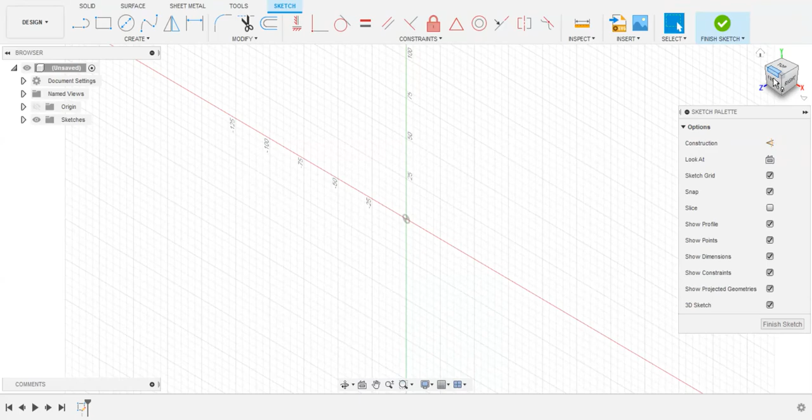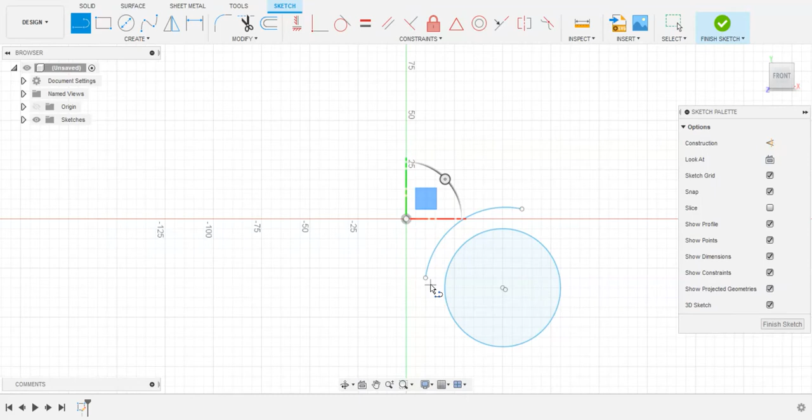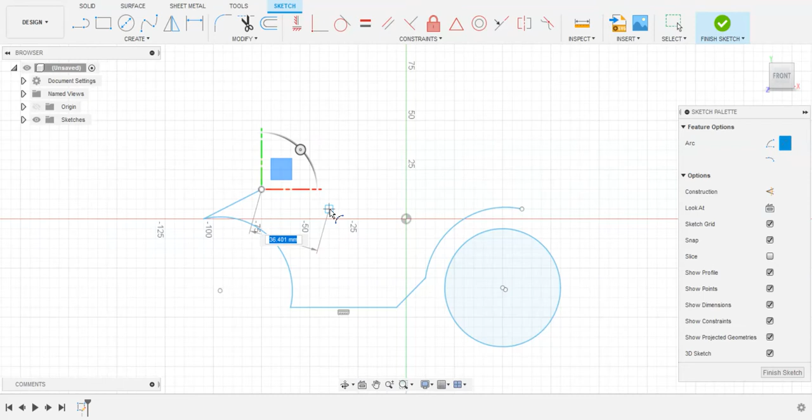First we are going to create a base model using a sketch. I'm going to prepare a little sketch to create our seat. I'm using arc to prepare the mud guard like this, and this here. I'm using arc again, 2-point arc, 3-point arc sorry, and I'm using arc once again.

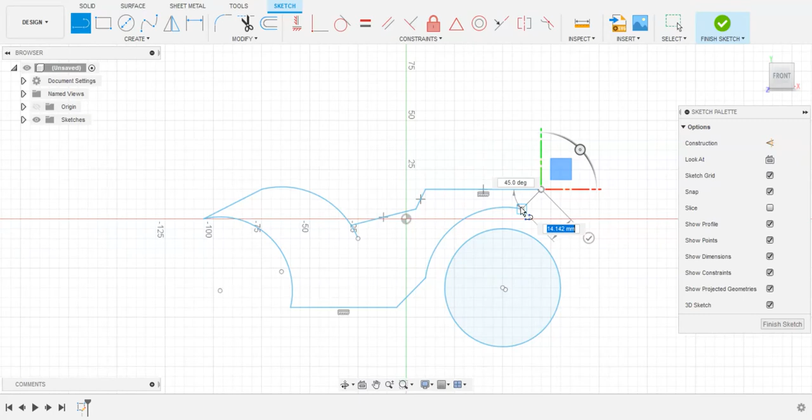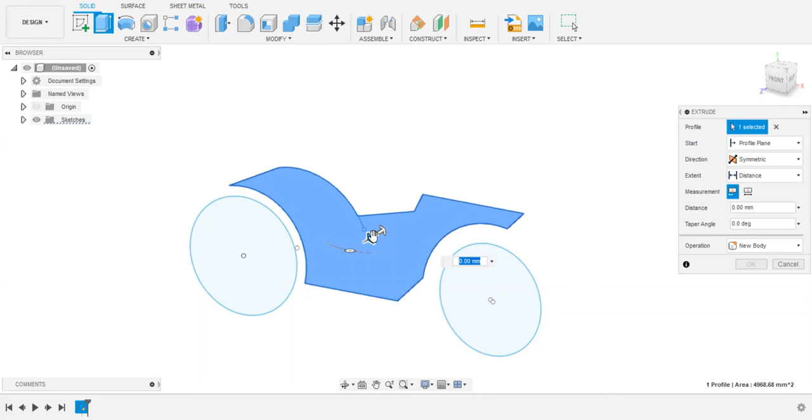Okay, use this circle again to create the wheel. Now this is just for the tutorial only, so use this symmetric side and extrude it like this.

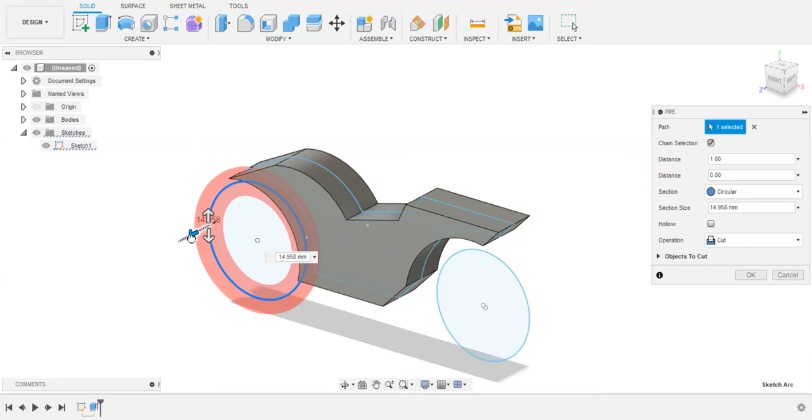Create a new body, open the sketch again, unhide the sketch, use pipe to do this, like this. I'm going to create the tires.

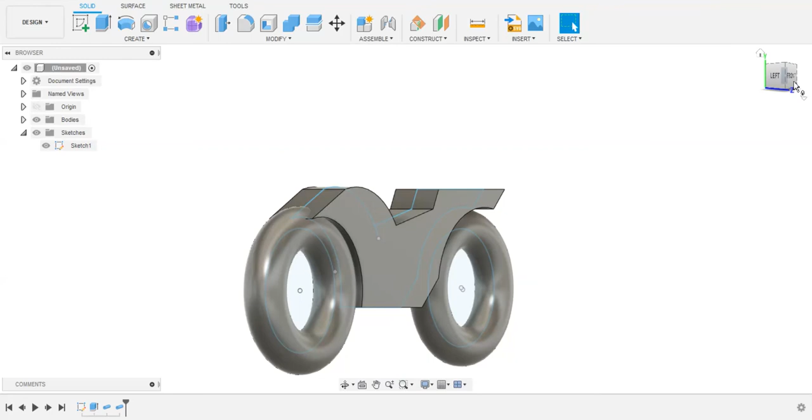Create a new body. Okay, use the pipe command again, select this new body. Now this is colliding with this body, so I'm going to move it a little bit, like here. Okay, now I'm also going to move this to here.

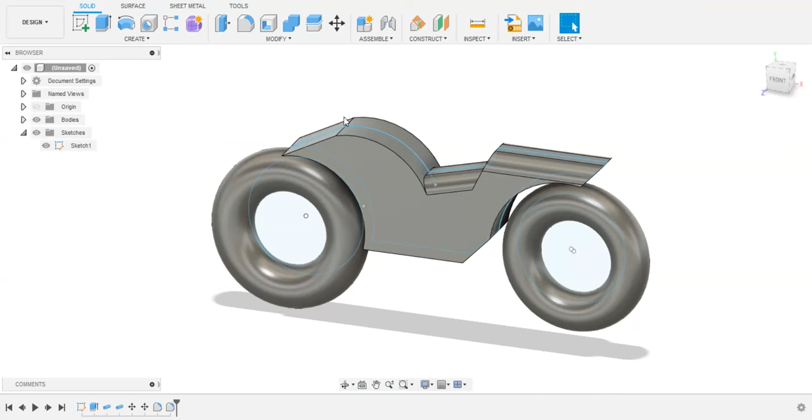Now we are going to create the seat over this surface. So first I want to give fillet to it, give fillet to it also, and also give fillet to it.

Okay, so go to Create Form, use this one, this here, and click here, use this 2-point option, and make a body like this.

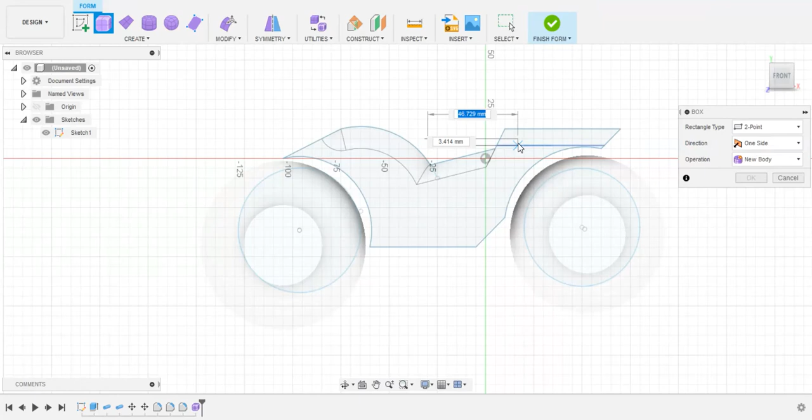Now what we have to do is do it like this, and I'm creating more edges inside this form.

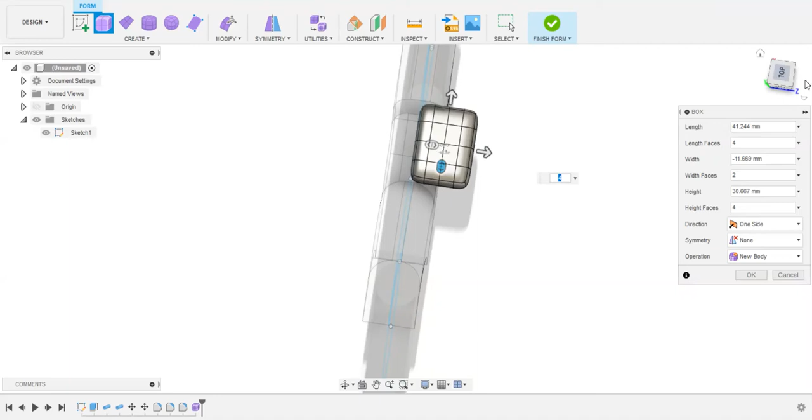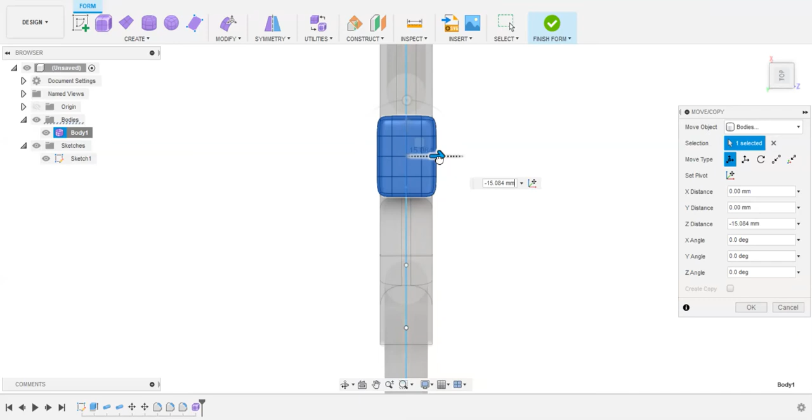Okay, create new body. Now if I want to move it between these bodies, right click on this body here and select Move and Copy, then click OK. Now if you click Finish Form, you will see our body is created, but it

is crossing this part a little bit, so we have to remove the correct part of this. What I have to do is create on this again and move/rotate to match it as parallel, and

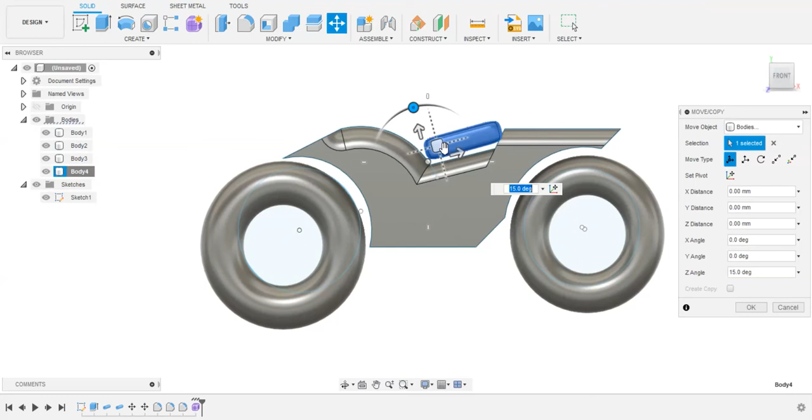click OK. Now we are going to use the Split Body command here.

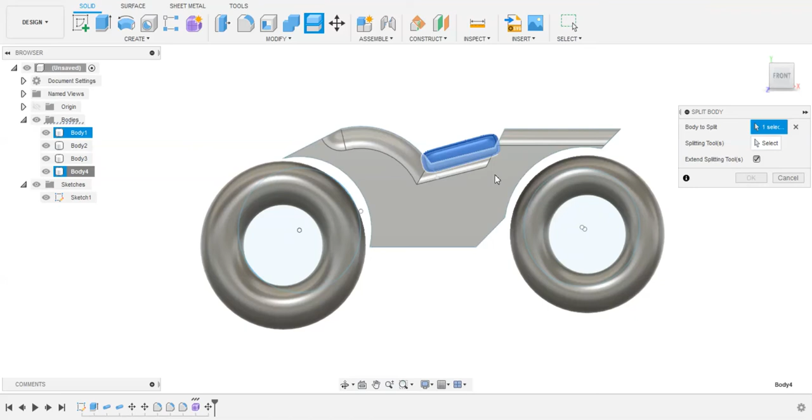We are going to split the body. By split, I mean I want to split this body using this tool. This base model is now the tool for this body, so I'm going to select the tool for it.

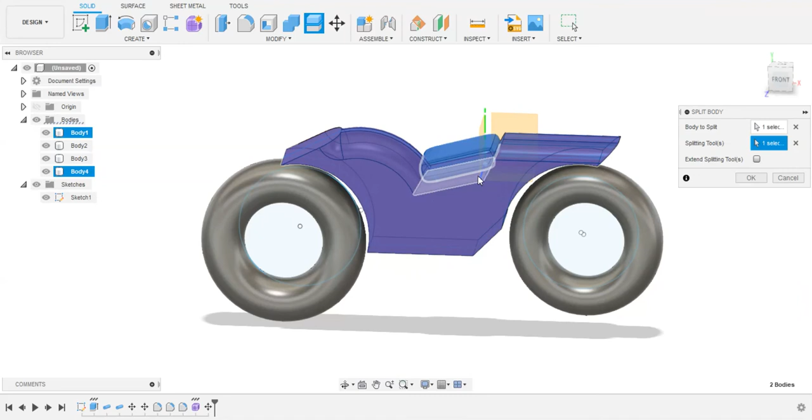Split Body tool, not the... sorry. You have to click onto this body, and while selecting the splitting tool we have to select this, and do not click the Extend Splitting Tool option, because it will split over the whole cross section area. So click OK.

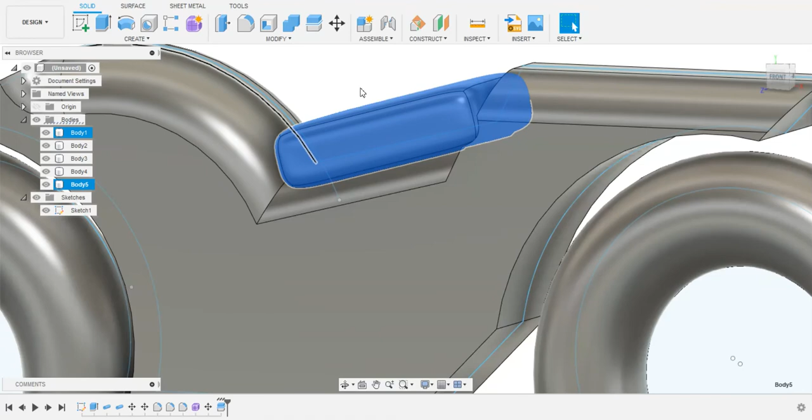Now you can see we have the fifth body part, which perfectly looks like a seat. Now the thing is, the removed part of this body still remains there, so we have to check it.

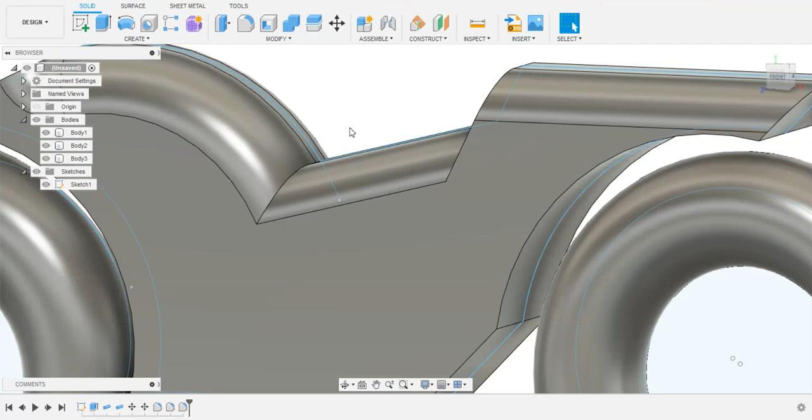So this is the part which we want to remove from this body. Right click on this and do not click Delete, because if you force delete this, it will show an error and also delete your whole body. So press Ctrl+Z. Go to body part 4 again and just click on Remove Part.

It will be easy to remove the part this way. Now there is no extra part remaining.

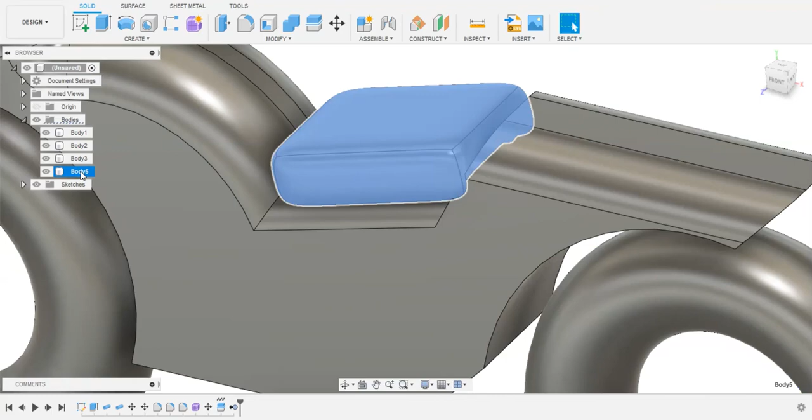You can do this. So this is how you can create a seat of leather, or a seat of any material. Now you can apply any material on this by going to the render setting.